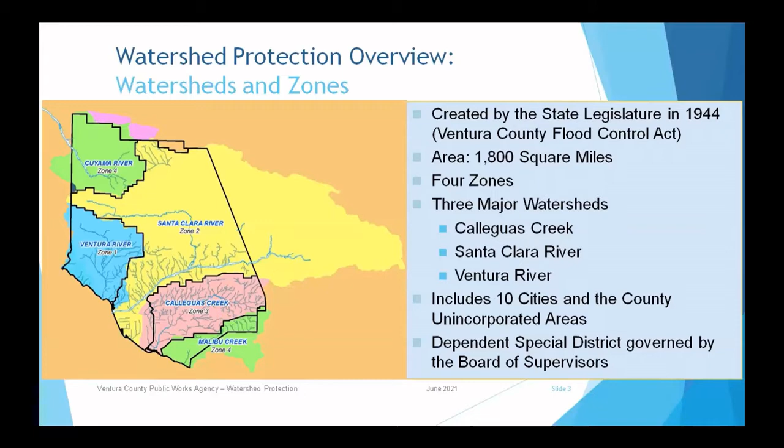Watershed Protection's management area is approximately 1,800 square miles and is divided into 4 zones. We are responsible for 3 major watershed zones, including Calleguas Creek, Santa Clara River, and the Ventura River. The project discussed in this presentation is specific to the Santa Clara River watershed. This presentation will discuss a proposed project concerning the Santa Clara River Levee.

The Santa Clara River Levee, along the southeast bank of the Santa Clara River, is in unincorporated Ventura County, between the cities of Ventura and Oxnard. The approximately 4.72-mile-long levee begins at Highway 101 and continues north to South Mountain. The levee was originally constructed by the U.S. Army Corps of Engineers in 1961 and has been owned, operated, and maintained by Watershed Protection since 1963. The levee protects commercial, residential, and industrial properties in low-lying areas within the Santa Clara River floodplain.

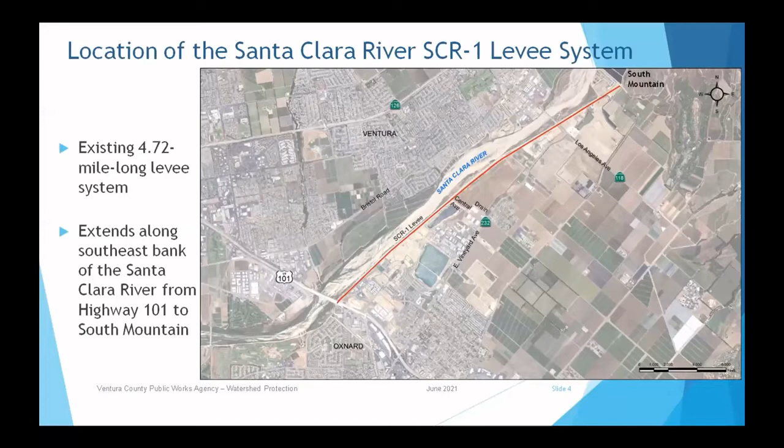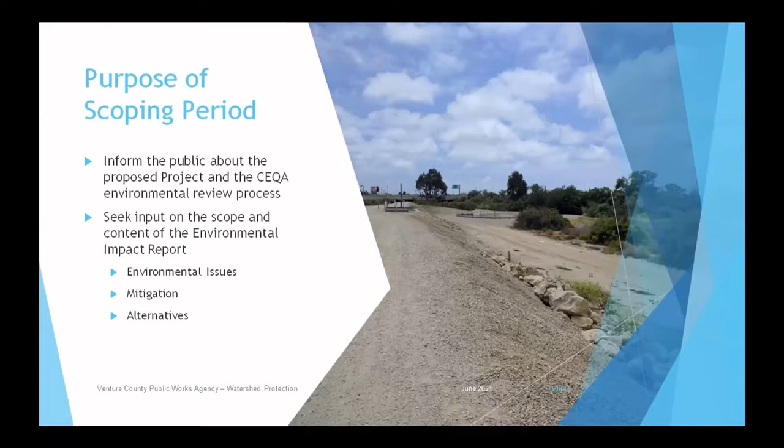The purpose of this scoping period is to inform the public about the SCR-1 project and provide information on the environmental review process as required by the California Environmental Quality Act, or CEQA. Scoping provides the public an opportunity to give input on potential issues that the Environmental Impact Report, or EIR, should address. Input can include specific environmental issues, mitigation methods to reduce environmental impacts, and potential alternatives to project actions.

This public scoping is being held as required as part of the environmental review process under the California Environmental Quality Act, or CEQA, a state law, and the National Environmental Policy Act, or NEPA, a federal law. The CEQA and NEPA review processes will involve analyzing the proposed project's potential impacts on a variety of resources in both the natural and built environment.

Any potentially significant impacts will be discussed in the Environmental Impact Report, or EIR, and measures identified to reduce impacts to the greatest extent feasible. Obtaining permits is also a crucial aspect of environmental review, as permits ensure project activities are carried out in accordance with applicable laws. Before we get into the proposed project, let's discuss a little about levees.

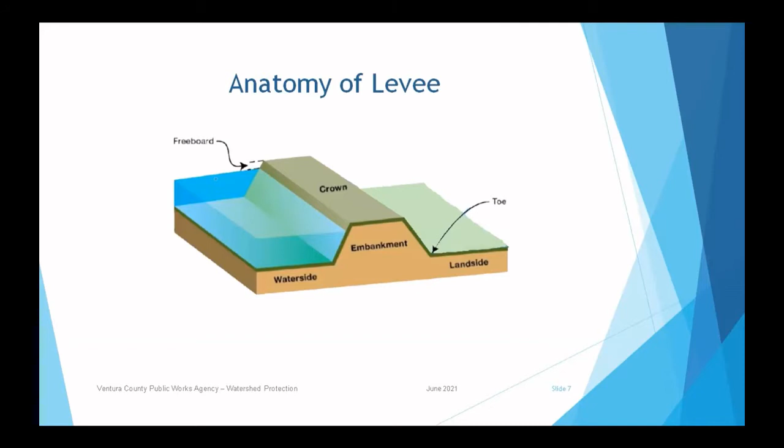A levee system is a flood control structure engineered to contain and convey flood flows to protect adjacent structures and the public from flood risks and damage. A levee includes an embankment, a top or crown, side slopes and toes, which are the points where the levee slopes meet the bottom of the riverbed or the land side of the levee. There's also an allowance between the top of the water surface elevation and the top of crown that we refer to as freeboard. There are several components that make up the SCR-1 levee system.

The top left photo shows the embankment, which is made of earthen material and is above ground, generally with a rock-covered side slope along the riverside of the levee. The land side of the levee is earthen. The riverside slope in the top right photo consists of rock armor protection designed to protect the levee from the erosive river flows. This rock slope protection extends below ground, which is known as toe down. There is an earthen maintenance road along the levee toe, which also functions as the mandated minimum 15-foot wide vegetation-free zone that enables unobstructed inspection of levee integrity.

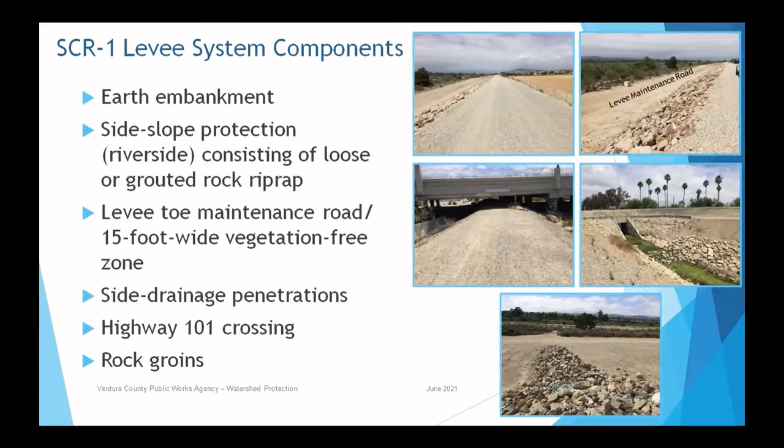As can be seen on the middle right photo, the levee system contains occasional side drainage or interior drainage penetrations, such as a pipe or concrete box that directs flows from land behind the levee into the river. These side drainage penetrations may have a closure to prevent water from backing up into the side drainage from the riverside. The levee crosses beneath Highway 101 in the middle left photo. The levee also has 75 rock groins protruding toward the river perpendicular to the levee, an example of which appears in the bottom photo.

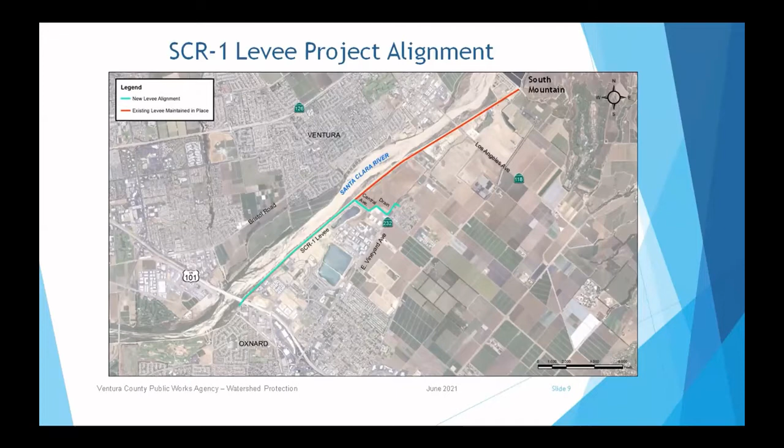The proposed levee improvements would extend from Highway 101 to Central Avenue Drain, where the project would then turn away from the existing levee and southeasterly towards Vineyard Avenue, as shown in the green alignment. No improvements are proposed upstream of Central Avenue Drain, shown in red. However, Watershed Protection would continue to maintain this portion of the levee, consistent with all flood protection operational best management practices, as it does currently.

The U.S. Army Corps of Engineers constructed the SCR-1 levee in 1961. The levee was damaged during high flows in 1969 and 1983. In 2005, the flood disasters associated with Hurricane Katrina drove the need for a nationwide levee certification program that was led by the Federal Emergency Management Agency, or FEMA. In 2009, an evaluation of the SCR-1 levee was conducted as a response to the Provisionally Accredited Levee (PAL) Systems Program, and structural levee deficiencies were found.

Watershed Protection pursued a funding partnership with the U.S. Army Corps of Engineers to further study the levee in each year, beginning 2014 through 2020, but the request was denied each year. We are hopeful that our 2021 request to Congresswoman Brownley and Senator Feinstein for $200,000 towards that study will be approved. In February 2018, Watershed Protection secured nearly $1.3 million in state grant funds from the California Department of Water Resources, or DWR, to continue technical studies, field surveys, fieldwork, prepare design drawings, and initiate the environmental review process.

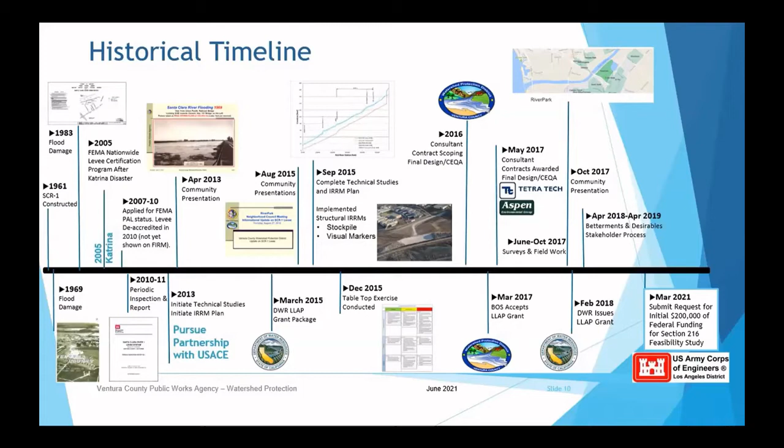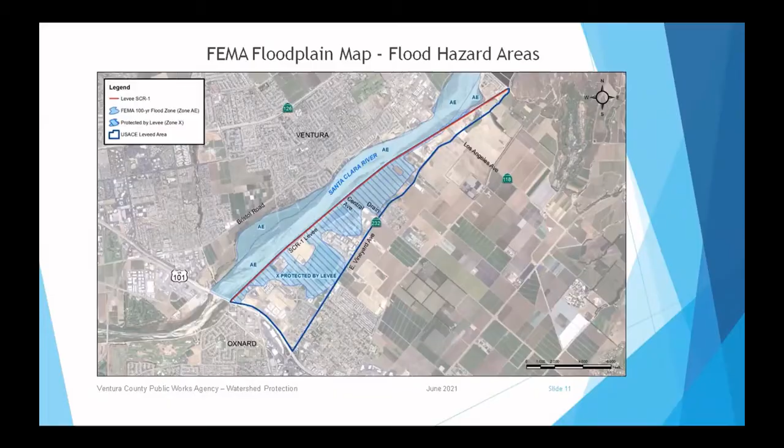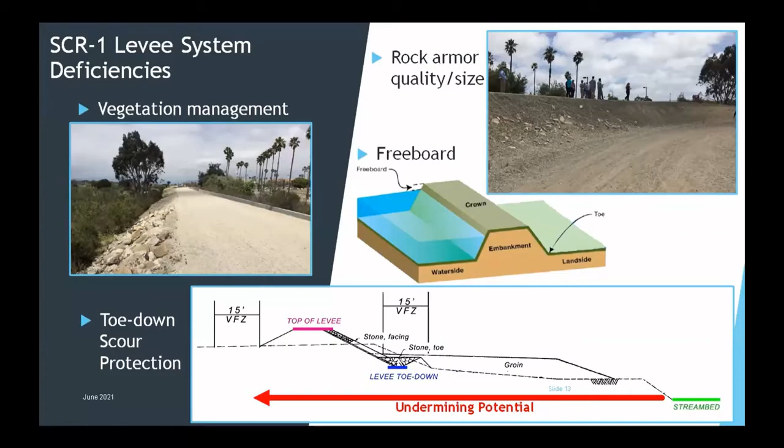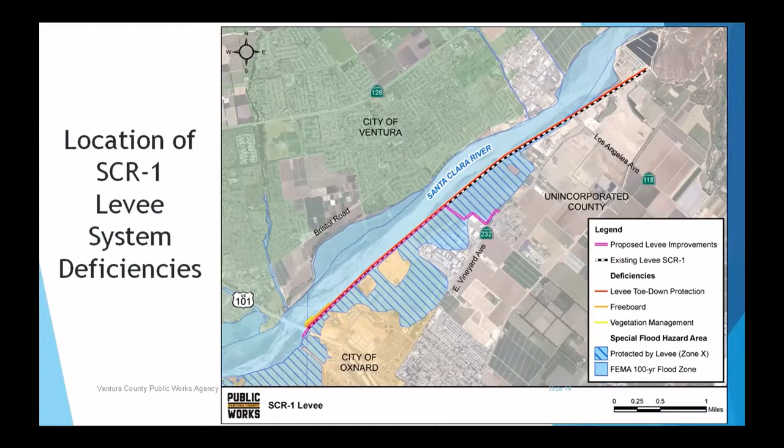This map shows the extent and location of the deficiencies. The red line indicates where the levee toe-down protection is inadequate based on the analysis of potential scour depths. The area noted in orange, immediately upstream of US 101, does not have sufficient freeboard. The yellow line indicates where vegetation removal needs to occur.

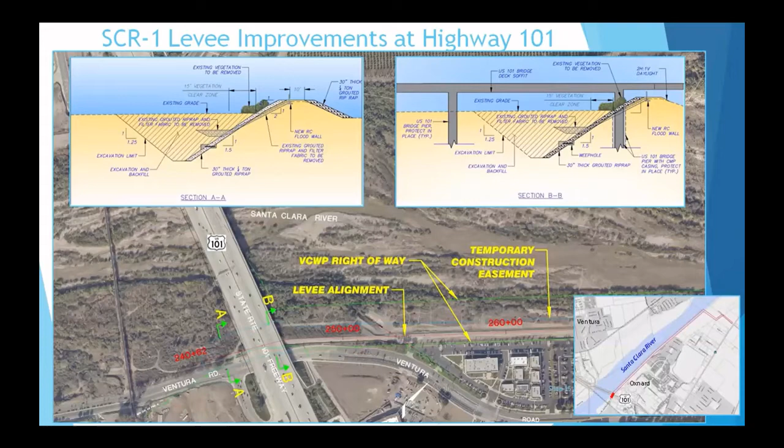North of Highway 101, the proposed levee design transitions from grouted rock riprap to 8-foot thick soil cement surface armoring. Soil cement is a mixture of cement and native soil. The cement content creates a strong surface that would not require rock armoring. Watershed Protection selected soil cement rather than rock riprap armoring for most of the levee alignment because it can be placed at a steeper slope and therefore within a smaller work area than is required for the rock, which reduces the project impact to biological resources within the Santa Clara River.

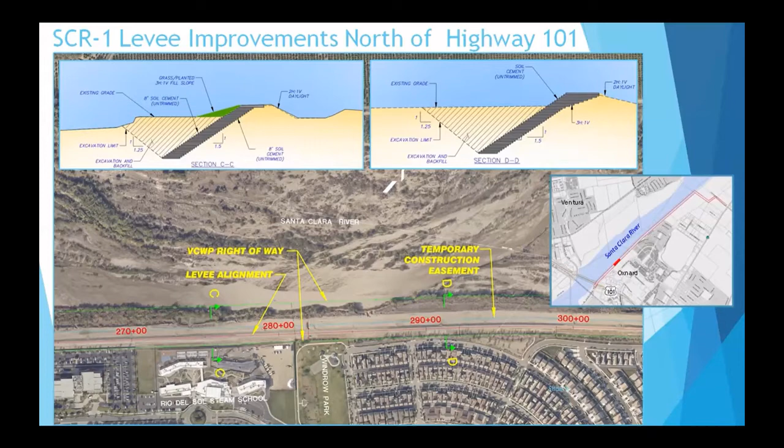Soil cement cannot be placed beneath the Highway 101 bridge due to the lack of suitable space to operate the associated machinery. The proposed levee toe north of Highway 101 would be up to 27 feet deeper than it is currently to protect against undermining by the river. Along the Rio del Sol STEAM Academy, the soil cement may be covered with a soil overlay planted with California native grass species. The next slide demonstrates additional features that may be installed on the levee alongside the school, depending on the feasibility and available funding.

Based on stakeholder input, and with strong leadership and collaborative funding contributions toward design work from the Rio School District, an accessible amphitheater, bird blinds, educational kiosks, asphalt bike trail, and grassy soil overlay are being designed for the portion of the levee adjacent to the Rio del Sol STEAM Academy. The design includes a gateway on school property to connect the school to the levee.

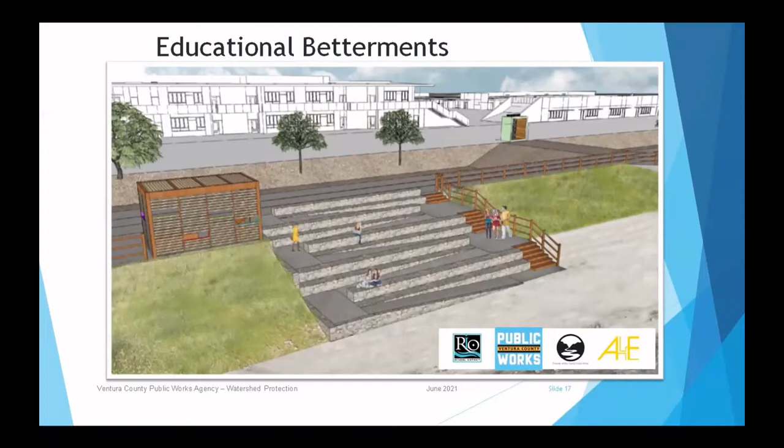The design is unprecedented in Ventura County and subject to review and approval by the Corps. As the federal agency that originally constructed the levee, the Corps determines what modifications of the levee are permissible. If the Corps approves incorporation of educational betterments onto the levee, construction may proceed subject to funding and agreement by the school district or other responsible government entity to maintain all non-levee features in perpetuity.

Beginning where the Central Avenue Drain transitions to a buried pipe culvert at approximately station 51400, the levee will be reinforced with ungrouted rock riprap for the final 2,750 feet. The new levee segment terminates on high ground in an agricultural field immediately west of Vineyard Avenue.

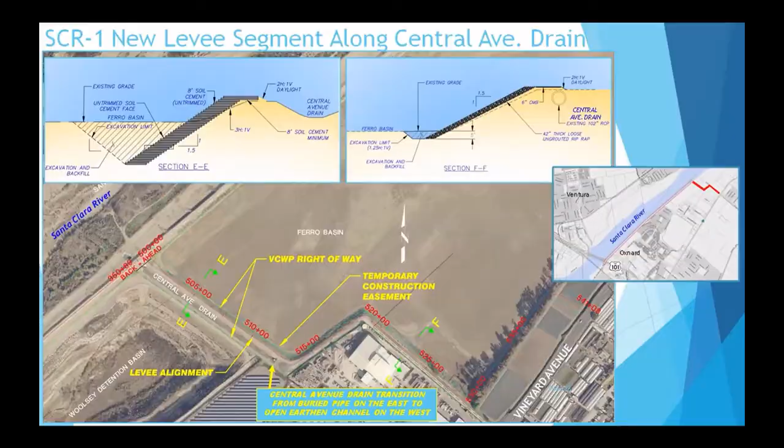Among the first steps in the environmental review process are surveys to determine the baseline or existing conditions. Cultural and biological surveys were completed in 2017 through 2019 for the SCR-1 project. As required by state law, Watershed Protection conducted cultural and archaeological surveys and coordinated closely with Native American tribes in the area to ensure that the proposed project would not adversely impact important cultural, historical, or tribal resources.

Consultation with Native American tribes is a requirement of Assembly Bill 52, or AB 52, which was passed in 2014, to evaluate project impacts on California Native American cultural resources such as artifacts, historical lands, and sacred places. AB 52 consultation has been conducted for the SCR-1 project, and the NEPA lead agency, which is the U.S. Army Corps of Engineers, or Corps, consulted with the State Historic Preservation Officer.

Historical records were reviewed from the California Historical Resources Information System South Central Coastal Information Center, the Native American Heritage Commission's Sacred Lands File, and available online historical databases.

No resources were identified within the project alignment, but several were identified within half a mile. As such, it's been determined that there is potential for deeply buried archaeological resources. The Cultural and Archaeological Pedestrian or Walking Survey completed for the SCR-1 project did not identify any previously recorded eligible archaeological or historic resources, and no significant artifacts were found within the SCR-1 project area.

Consultation with the Barbareño Ventureño Band of Mission Indians identified one prehistoric burial within half a mile of the project alignment, but no other previously recorded tribal cultural resources were otherwise identified within the project area. Various biological surveys were completed in 2017, including an assessment of the quality of the Santa Clara River through use of the California Rapid Assessment Method, which determined that the attributes of the Santa Clara River are generally high quality.

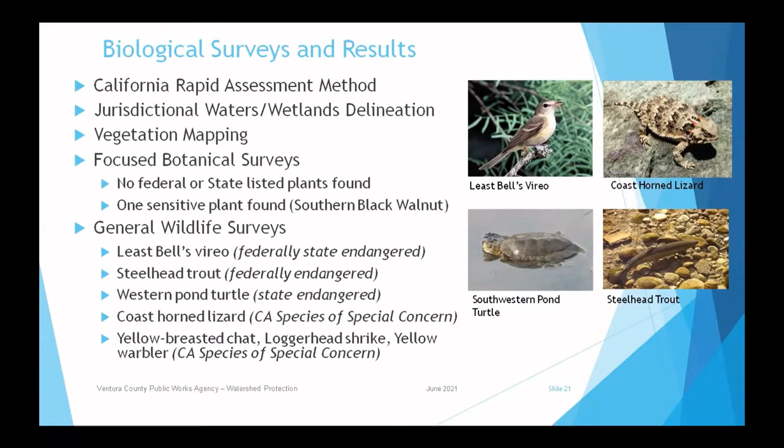The Jurisdictional Waters and Wetlands Delineation determined that the project area supports California Department of Fish and Wildlife, or CDFW, State Jurisdictional Habitat, Regional Water Quality Control Board waters of the state, Corps jurisdictional wetlands, and Corps non-wetland waters. Vegetation and wildlife surveys were conducted, including protocol surveys for the federally and state-listed least Bell's Vireo. Several special status bird species were identified, but no federal or state-listed plants.

Based on this preliminary evaluation, the proposed SCR-1 project may result in significant impacts and therefore an Environmental Impact Report, or EIR, is the appropriate CEQA document. We anticipate the EIR will focus on the issue areas of air quality, biological resources, noise, and transportation impacts associated with the project. The EIR will evaluate in detail these potentially significant impacts.

Regarding air quality, the EIR will address construction, operation, and maintenance of the proposed project, which would generate pollutant emissions and fugitive dust. The proposed project has the potential to violate regional air quality standards or contribute to an existing or projected air quality violation. There may also be a risk to construction workers of contracting valley fever. This is a respiratory illness caused by inhalation of disturbed soil containing a species of fungus suspected to occur in Ventura County.

With respect to biological resources, the proposed project would include construction and operation activities adjacent to the Santa Clara River, which could result in significant impacts to common wildlife, nesting birds, special status or rare wildlife species, and special status plant species. Construction and operation could also directly or indirectly impact jurisdictional waters, wetlands, environmentally sensitive habitat areas, critical habitat, and wildlife movement.

Noise caused by construction equipment could potentially exceed existing noise levels at sensitive receptors, such as residential areas and schools. Operations may involve activities and equipment similar to construction, and thus may also have the potential to exceed noise thresholds. The proposed project may also increase the vehicle miles traveled due to the extent of heavy equipment and vehicles required for construction.

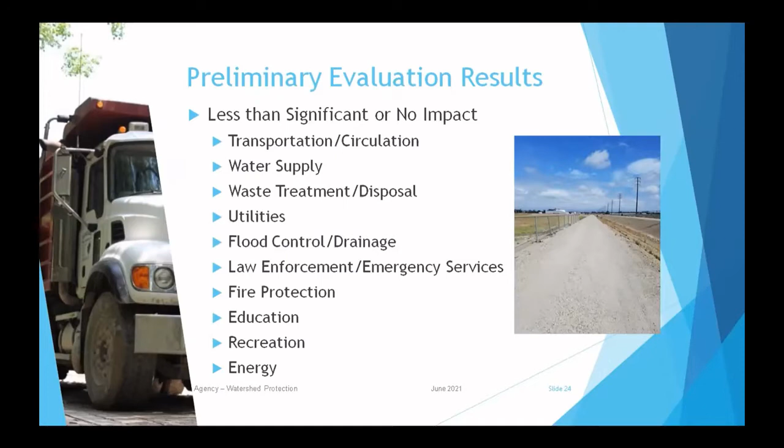Another public meeting will be held after publication of the draft EIR, with a public review period of 45 days. Finally, the last step of the EIR process will involve responding to those public comments and publishing the final EIR, including a mitigation monitoring program. Following publication of the final EIR, the Ventura County Board of Supervisors will hold a public hearing to consider public input and ultimately decide if the SCR-1 project will be approved or denied, and adopt the final EIR and mitigation monitoring program as compliant with CEQA.

If the proposed project is approved, construction can begin, assuming a funding source has been identified, and only after all permits have been obtained. Construction would be monitored to ensure compliance with all adopted mitigation measures. Because the SCR-1 levee was originally built by the U.S. Army Corps of Engineers and federal permits are required to alter the levee, an environmental review process will also be completed to satisfy the National Environmental Policy Act, or NEPA. The Corps has determined that an environmental assessment, or EA, will be the appropriate document under NEPA. It is anticipated the draft EA will be prepared following compilation of the draft EIR, and much of the analysis will mirror or rely on the information contained in the draft EIR.

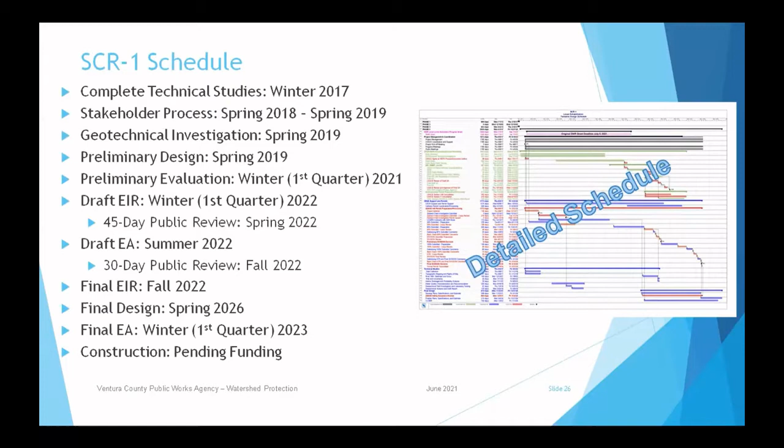This slide presents the anticipated schedule of major milestones to complete the design and environmental review process for the proposed project. To date, biological and cultural technical studies and geotechnical investigation have been completed to support the project's preliminary design and environmental evaluation. The information obtained from these studies and investigations, along with comments received during the public scoping period, will be used to support preparation of the draft EIR, which is expected to be available for public review by winter 2022. As described in the previous slide, a draft EA will be prepared along with the draft EIR. This draft EA is expected to be completed by summer 2022 and available for public review in fall 2022. Public comments received in response to the draft EIR and draft EA will support the final EIR and final EA anticipated to be completed in winter 2023. Construction of the SCR-1 project is contingent upon Watershed Protection securing funding, such that the time frame for construction cannot be stated at this time.

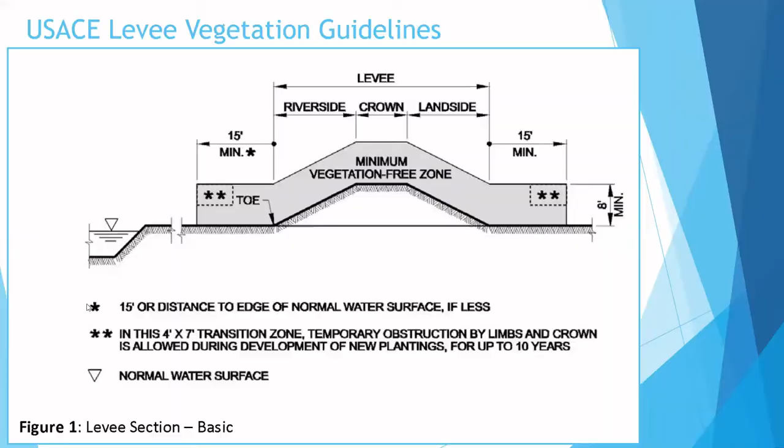So it's been mentioned already, we do have the 2011 Santa Clara River document that touches on this bike path. In addition to that, we do have our active transportation grant, which the public outreach will be beginning probably closer to winter of this year. There will be a website that will talk to this. This bike path will be included in that plan. We also have a local roads safety plan that will touch on it as well.

And our folks over at the county have touched on this a little bit, but we do have to be careful with the timing of when we request funding for such a bike path, because we are at the mercy of the levee improvements coming in. So the city does intend on applying for grants. However, we intend on doing it when it makes sense to do so, because most grants have very specific timelines that we need to meet. And so the only way to meet those timelines is if the levee improvements come in first and foremost. And so at least that's where the city stance is at this time.

Great, thank you for that, Tatiana. Our next question is, how is the project resilient under the predicted increased climate change storm intensities?

Right, so we covered the parameters that were evaluated to accommodate future climate change. And let's see, resiliency is somewhat... what it does is we're increasing the toe down in the river to prevent scour and undermining of the levee, which allows it to stay in place without repair.

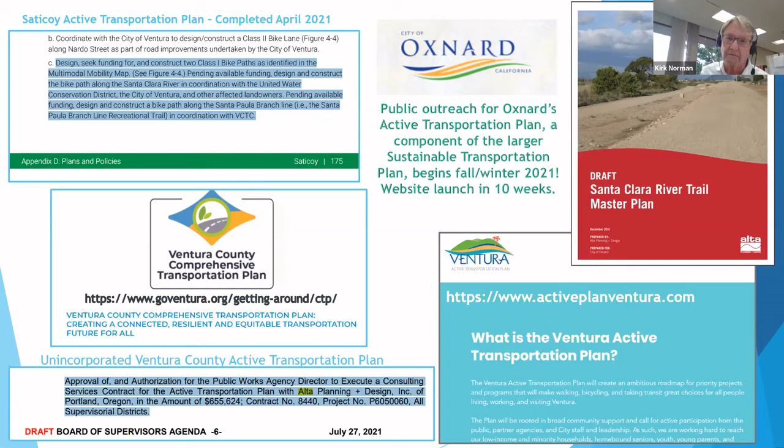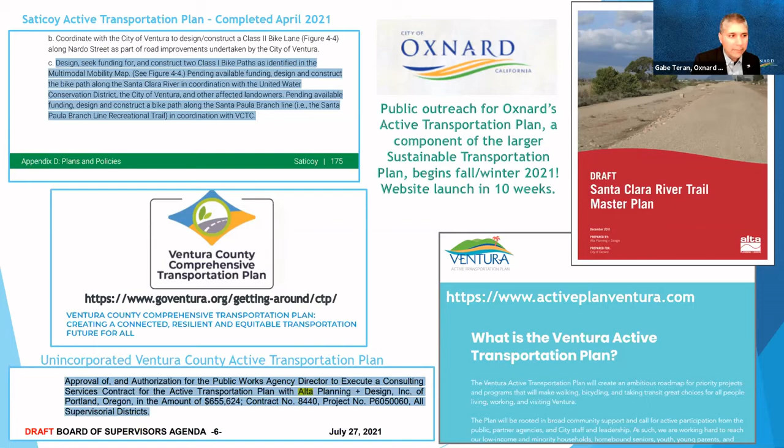Okay, thank you. And our next question is, what is the condition of the levee downstream from 101? How does the new part integrate with the older part? And I'm guessing that Mr. Fernandez is referring to SCR-3, unless he means further south of that, but I'll let our county staff jump in on that. Sure, I'd say a couple of things and then let Angela and Gerard fill in on some of the details because they're more familiar with the levees downstream.

But basically the SCR-1 levee improvements protect from Highway 101 upstream to Central Avenue drain. The SCR-3 levee, also on the Oxnard side, when completed, will protect between the Union Pacific Railroad downstream to beyond Riverpark. And in between those two is the Wagon Wheel development, which is again a separate flood protection measure. So long story short, each of the segments of levees, SCR-1, SCR-3, and the Wagon Wheel will protect their areas of development. And with that, I'll turn it over to Angela and Gerard if they have anything to add.

This is Gerard, the only thing I would add is that while out of necessity, each of these projects is compartmentalized in terms of their ripeness, where they are in the design, where they are in the environmental approval, where funding is available for them. The rubric in which we're dealing with the planning and construction of all of these allows for and presumes seamless coordination.

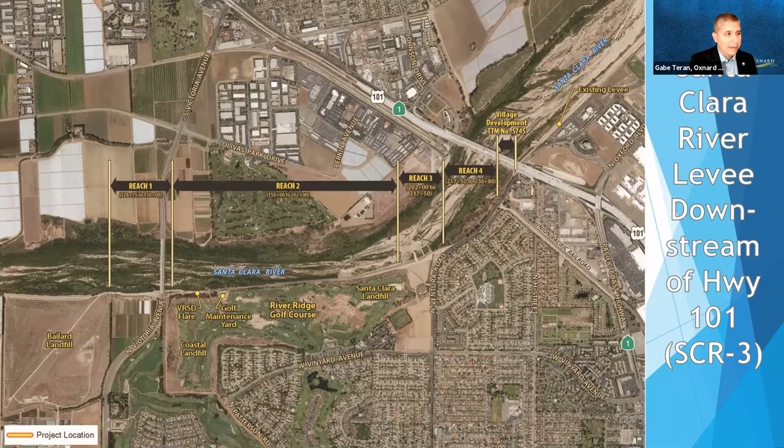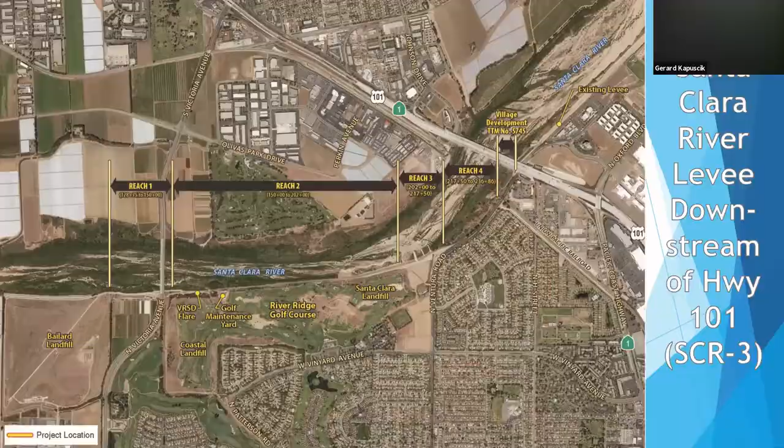So the reason that we selected a flood wall is because we don't have an existing earthen levee once you get to that big bend in Ventura Road. Angela, can you go to the other chart that's closer? There you go. Okay, so the earthen levee, I don't know if you could see my cursor. We can. Okay, so the earthen levee ends right around here. And we have all of this native riverine habitat here, which supports a number of endangered least Bell's vireo territories. And in order to build more earthen levee to protect this community, we would have to take out a lot of this habitat. So we wanted to have the smallest footprint we could. And so we chose to go with a flood wall with sheet pile driven vertically down into the ground to the scour depth.

So also to continue along that vein of minimizing impacts to the river, we decided at this high point in Ventura Road to place a floodgate across the street and then continue the flood wall on the land side of the street, which would have no impacts to native riparian habitat. And then the Wagon Wheel developer is going to tie in to our flood wall on the north side of the Union Pacific Railroad. They will build their own, I think it's a combination embankment and flood wall, last I heard. I know their design has been in flux, and our permit section here is reviewing their design. And then I think there's going to be a street here, so they will put their own floodgate across that street, and then there will be more flood wall.

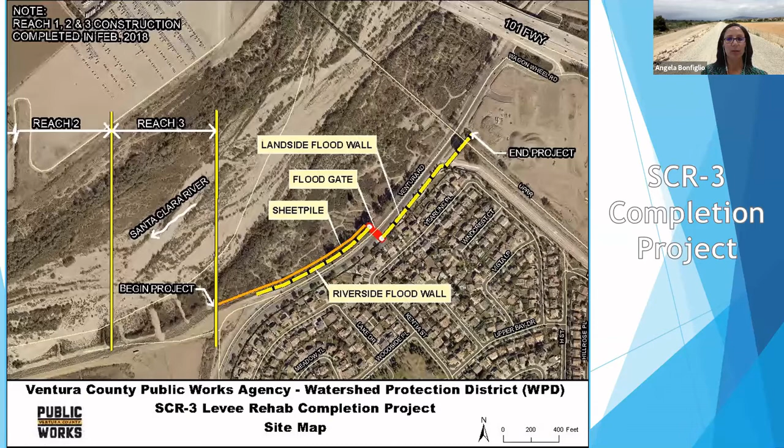And it will accommodate a bike trail. Yeah. Oh, yes, that's right. Yeah. And if I could just build on that, it looks counterintuitive, but there are reasons why it needs to be this way. First is there's absolutely no room for us to have an extension of a levee in the river bottom from the curve in Ventura Road. I can't use the pointer, but maybe Angela can as I'm speaking. From the curve in Ventura Road all the way up to where the Wagon Wheel project begins.

Secondly, we are building protection on natural high ground topography. So we're using the natural topography as a natural basis on which to build the protection. That does require this area of Ventura Road to continue to be flooded occasionally, but it's a bathtub effect which is contained by the floodgate here and will be contained upstream at the SCR-1.

And a decision was made that the protection from 101 through the UPRR Railroad, which is another constraining factor, because in order to have a seamless levee to go from the curve of Ventura Road up through and under the railroad bridge to 101, the UPRR Railroad would essentially have required us, if they would have given us approval at all, to reconstruct their entire railroad bridge, and that would drive our difficult journey of getting funds to do levee projects to a stratospheric level.

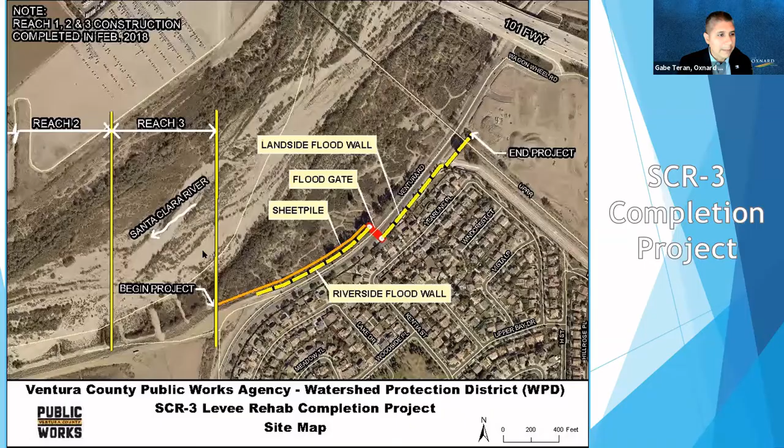And this next question, as mentioned, grants and bond issues often encourage or require multi-benefit elements such as recreation and urban greening. How can Ventura County Watershed Protection District take advantage and optimize use of these funds if it is not used in the project scope or EIR?

Yeah, I think they are. I don't think the EIR is written to say that this is strictly a flood control project. It's written to say that these things can be accommodated at a later time. And at that point, if something comes along where other funding is available, an addendum to the EIR can be prepared to incorporate additional items like that.